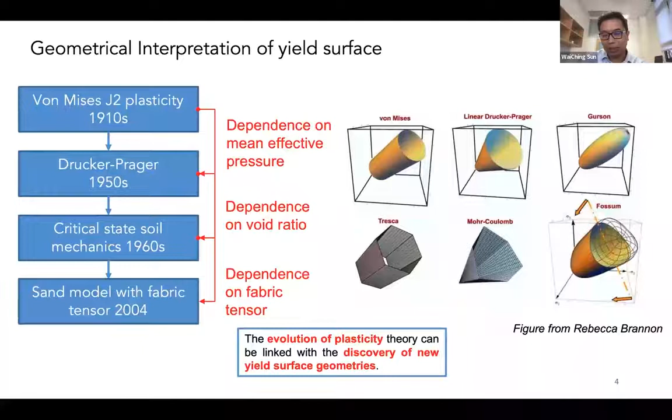But there are scenarios that make this approach, where we try to come up with a mathematical equation to describe the model, very difficult. And they are related to the dimensions. All those materials shown before assume isotropic behavior, and so the stress can be sufficiently represented by the eigenvalues of the stress tensor, which are actually the principal stresses. But if you don't have any symmetry, you are dealing with at least 6-dimensional components of the stress to create these criteria. And if you have the size effect, then we actually need to include a higher order effect.

And then we also need to think about how to evolve the history dependency in terms of the internal variable. I just want to show an example of a recent work we did with the micropolar yield surface. We have a direct numerical simulations model that we are using to homogenize to get a macroscopic yield surface.

And in this material, we have the classical strain mode, kinematic mode that actually create a stress, but we also have a non-conventional stress called a couple stress. The tractions of the couple stress are related to the moment divided by the area, not the force divided by the area. And you can see the complexity when I deal with that 6-dimensional space. This is not even the micromorphic shown here, just the micropolar.

You can see that when we want to do simply a regression in such a high-dimensional space, it becomes increasingly more difficult. Okay, so one may say that a curve fitting in 1D probably doesn't need machine learning, but in such high-dimensional cases, how we create the right geometry is actually necessary, and how this geometry affects the physical response is also another important thing that we would like to explore.

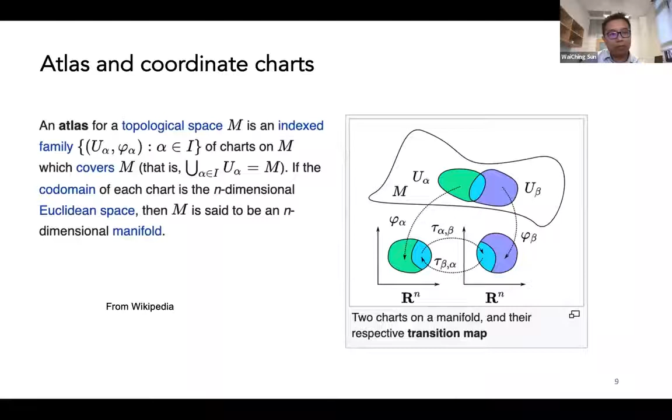Okay, so in particular, what we're trying to create is those local mappings that can allow us to describe the yielding, and then we want to connect them so that they can form an atlas that is actually consistent with each other. And this would be the alternative approach to allow us to define the yield surface.

And what we actually want to show is whether this really complex approach is necessary or not, and if we're actually using this, what is the benefit? In this particular case, what we actually want to answer is if I change the microstructure, how would the corresponding yield surface change, and whether we can predict the evolution of those yield surfaces?

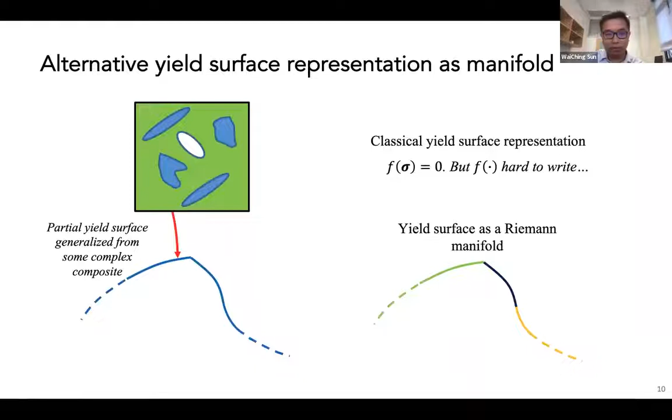Okay, so from a procedure perspective, I will explain what they did here. Imagine that the true answer is just a von Mises yield surface. That would make this approach completely unnecessary, but for the argument's sake, we want to do that. Then if we measure the yielding of a von Mises material, we will get those point clouds that are on the cylindrical object. We can partition those point clouds using Poisson disk sampling. And then we can learn the local coordinate chart mappings one by one to form local patches.

And then the final machine learning procedure is to make sure that in the overlap regions, the two patches are actually consistent with each other. This is the machine learning approach, in which each local patch is trying to learn the mapping of the yield surface locally, but not globally. This could be helpful for a material that requires different fidelity in different regions of the yield surface.

But long story short, we did not do anything special except that we use multi-layer perceptrons that are overparameterized, and we use specific distance measures. In the classical way to create a yield surface, we would use the mean square error. Here we use the Sinkhorn regularized distance that comes from optimal transport theory. There's an entropy term there, and we will see why this entropy term is useful. We try to fit it, but we also want to allow some level of entropy, and this entropy term could help us to overcome the noise.

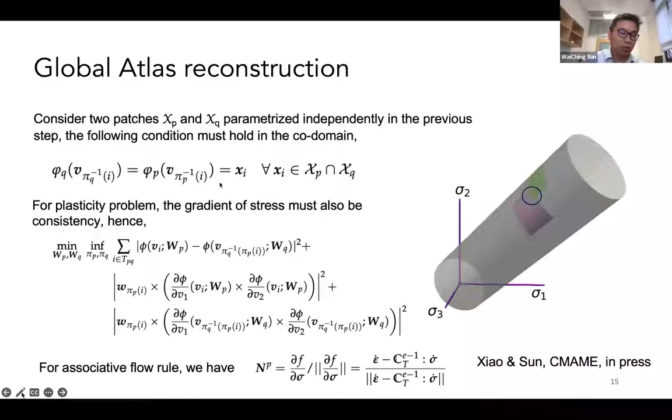Here, the machine learning is also trained in two steps. First, we ensure that the individual patches are trained properly, and then between the two patches, we need another training to make sure that the two patches are consistent with each other.

Okay, so this would give us not just a good representation of the yield surface, but more importantly, we found out that this could have a benefit in dealing with a material that has very sharp changes in the plastic flow directions. So we will introduce a closest point projection to deal with the non-smooth yield surface problem. So this is the yield surface.

And now notice that we no longer have a global yield surface, but we have individual patches. Each patch actually has a center. When we try to introduce a return mapping to get the correct stress, we will run the algorithm with a trial stress and we try to return it.

In the classical way, this is not a problem, but in Mohr-Coulomb plasticity, in the corner, because there are two admissible stress gradients, the stress gradients are bifurcated, and so this would lead the Newton-Raphson algorithm to have a hard time converging.

But in the new approach, because we can conduct the local projection between the local patch and the trial state, but not through the entire global yield surface, we can bypass this problem by having the manifold projection directly onto the individual patch.

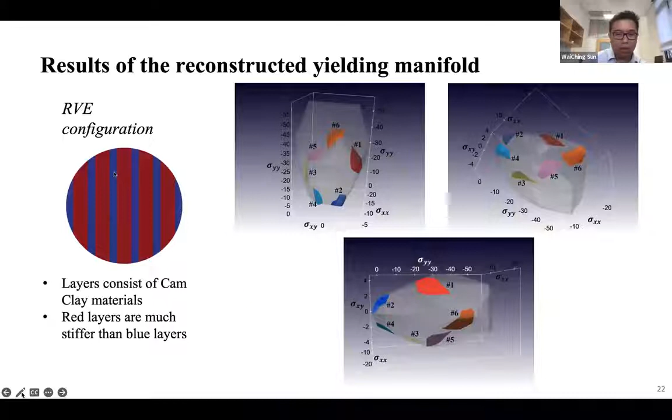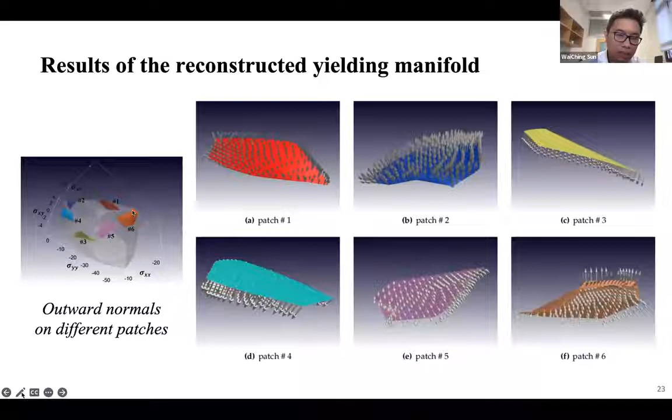You can see that surprisingly, the actual yield surface that is necessary to construct is way more complex than what we think, even though it's just a layered system. And if you look at the stress gradient, you will see the same. Okay, it's not like a circle. And you can also observe some sharp corners in some of the stress space, like in patch number 6, where you can see the abrupt change in the plastic flow directions.

And this could be explained by the pattern of the direct numerical simulations in the subscale. What we actually see, which I think is pretty interesting, is that when the two plastic flows are actually similar, the underlying deformation patterns are actually quite similar. This is actually the stress space loading in slightly different stress combinations on the same yield surface at different locations. And you can also see that when the two yield surfaces are similar, the underlying microstructure deformations are quite similar. However, if we have something that is very far apart, we can see that the pattern could change quite a lot.

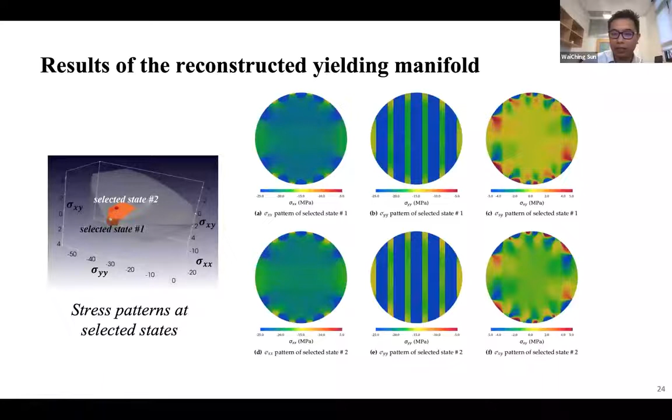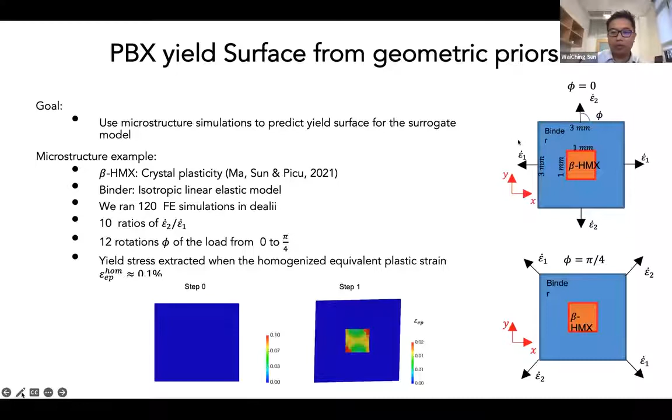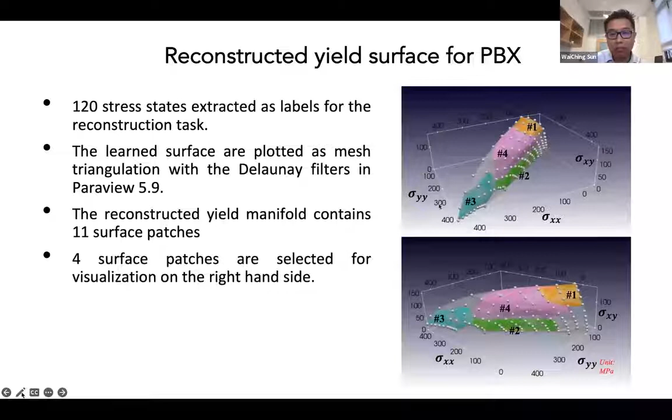We can also apply this. This is just another example on the HMX with a polymer layer that is actually used for explosives. And in this case, in the 2D simulations, when we try to homogenize it in that patch, you can also see a different geometry that is actually pretty hard to parameterize by hand. You can also see that for different states, the shape or the plastic flow directions are actually constrained so that they are consistent with the yield surface.

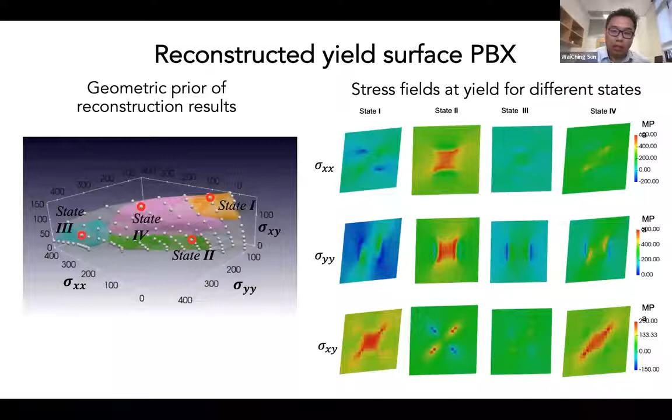So what we actually find out here is that for the actual yield surface, if you want to increase the quality of the predictions, or more accurately the precision of the yield surface, you require more advanced geometrical tools to create arbitrary objects that represent the boundary of the path-dependent and path-independent behavior. And this manifold approach can provide a convenient way to introduce arbitrary complexity. The same thing can, in principle, apply to elastic energy functionals or other types of material as well.

Now, the second question that we would like to tackle is how do we evolve those yield surfaces? If you know the material yields, the material can also evolve beyond yielding. So how do we capture that? In a classical way, as we mentioned before, we're going to hook up some kinetic rule like the void ratio, like a Gurson model. We're saying that the yield surface depends on the void growth, and then we try to come up with a story, and then that story, confirmed by observation, converges into mathematical equations.

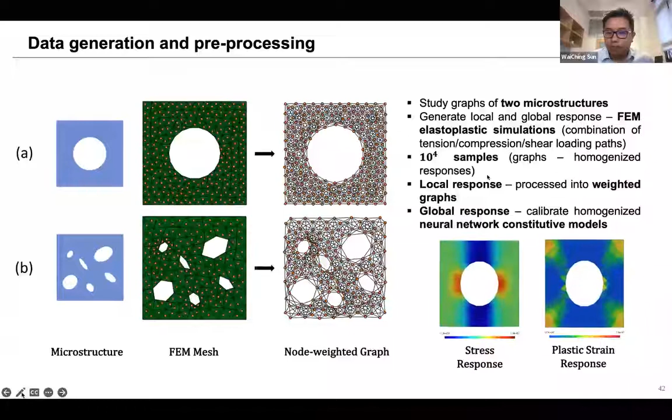These are two examples we tried. There's a classical hole problem, and then there's another problem with void distributions, and then we collect a lot of finite element simulations to create a database that's not exactly that large, but with 10 to the 4 samples. And then what we actually want to do is to see whether we can predict the evolution of the new plastic strain. So to do that, we need to see how much dimension we need for the latent space here.

And what we actually did, in this 2D example, is that we tried multiple spaces, 2-dimensional Euclidean space, 16 and 32, and then we see what the trade-off is. As we can see, if you increase to a larger dimension latent space, I can get more detailed performance, and then my loss will go down. But if I keep adding it, there's a diminishing return on adding more dimensions to represent the data.

You can also find that in a linear method, like singular-value decomposition. The only difference is that in the graph case, the dimensional reduction is not conducted in a linear manner, but in a nonlinear manner. So this is the internal variable graph, and this is the reconstruction. The reconstructions are using a vector.

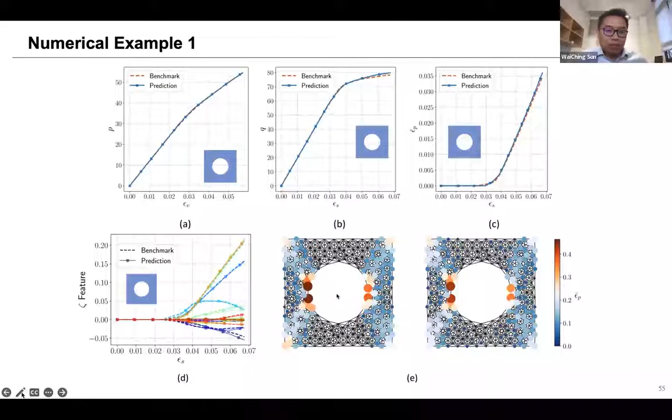This is the time evolution, and then this is the direct numerical simulation response corresponding to the return mapping constitutive law response with access to the microstructure. And you can see that by controlling the feature in the very low dimensional vector space, I can actually get back the details of the deformations. This is also the case for the more complicated architected microstructure.

And then we can also check that the advantage of it is that we can actually also control the detailed physics. In particular, in this example we can also ensure that if the material is unloading, the internal variable is actually not evolving, which is actually hard in a black box RNN setting because there's no distinction between the elastic and plastic, and then there's no internal variable that can be integrated.

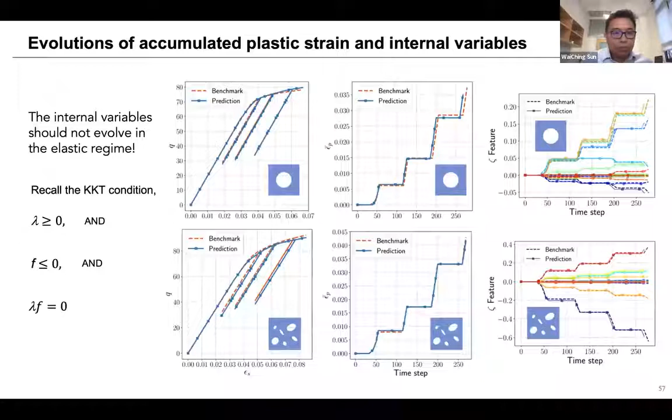So the last question, I think I'm almost running out of time, is that I want to talk a little bit about not just what we do with the data, but how we get the data. So if you notice, we need to write a very high dimensional model. This is, by the way, related to a project on the micromorphic continuum, where we need to write a micromorphic yield surface that is very high dimensional. But here, what we want to think about is the real questions.

In real life, when we try to get the data, we actually need money to do it because we need a physical experiment or MD simulations or dislocation dynamics. But anyway, that time and effort are finite. How do we actually use as little data as possible to create a good model? So the experiment itself here could be represented by a Markov decision process. We can think about the experiment as a situation where we continuously perform different tests, and then it has a reward.

I won't go over the details because I think I'm running out of time, but what I actually want to talk about is that in our new work, where we try to use a type of machine learning, deep reinforcement learning, to design what kind of loading path I need to create a specific model, we can actually also take advantage of our representations of the state.

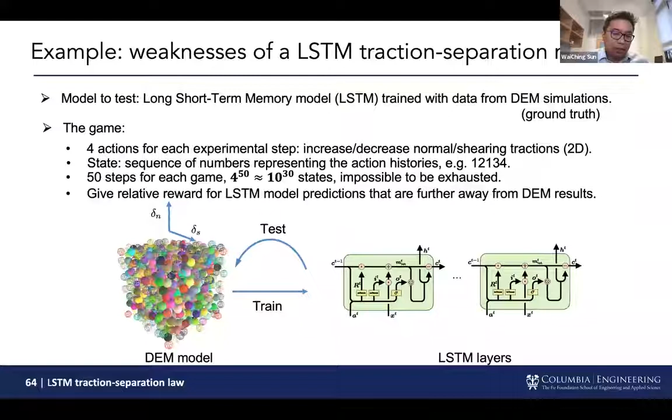And then we basically have a lot of traction and separation, the deformation to create a database, and train the long short-term memory layer to replicate the stress-strain behavior. You can see that on the surface, the LSTM can provide some very good response. But we can also use reinforcement learning to find out the weakness. This is the actual weakness of the LSTM simulation.

I hope I'm not going too fast, but our conclusion is the following. In the big picture sense, we want to see whether we can come up with a new type of model that is not only able to explain the physics, but quantitatively represent the solid mechanics behavior in a predictive manner, in a very precise sense. So precision is what we're trying to achieve in this line of research.

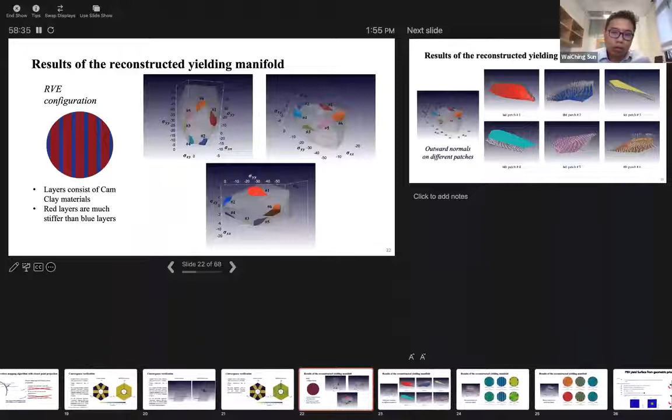If you have fewer patches, in principle, you can actually put the burden onto the local mapping, but then you need to learn a more complex mapping. And also, I want to mention that there's another thing we need to think about: there's no guarantee that all the patches would create a closure, which could also be a problem. In this case, we have a closure, so we know that the object is actually closed.

But in the von Mises case, there shouldn't be any closure, because that cylindrical object goes infinitely in the infinite directions. So this is actually something that could be a limitation of this approach. It's actually better for the material property, for the parametric space, to have a closure. If you anticipate a half space, then it won't be as efficient. So, like the von Mises, it doesn't depend on the mean pressure, right? So this can go to infinity, but then your patch is finite. So anyway, this is one of those things. But in general, you can always find a parametric space that actually creates a closure.

Okay, thanks for all those questions. Any other questions for the speaker? Professor Sun? If no one else is there, I can ask one more. Yes, Suku, please. Sure. I can talk to you afterwards, of course.

The other question was, did you also check, depending on the architecture, the depth and width of the network? Do you get convergence if you change the number of neurons, basically? Oh, you mean do I tune the hyperparameters? Yeah, if you change the hyperparameters, do you have to play around with that, or do you get pretty much the same result? If you tune the hyperparameters, you will get different results. But I would argue that, for the multi-patch approach, you probably have an easier time tuning them.

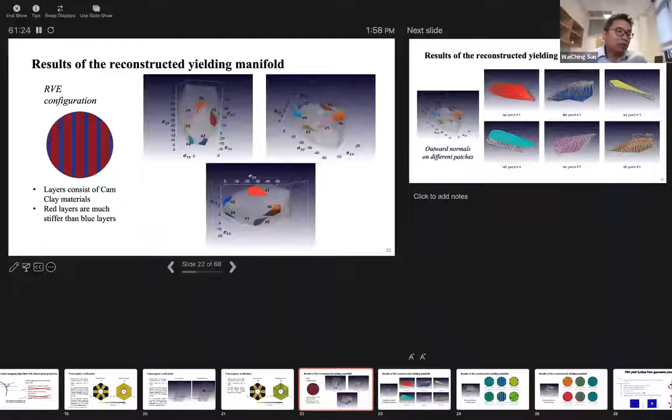simply because I can address the complexity by reducing the size of the patch to make sure that individually the complexities are roughly similar. You can also change it multiple times, but this is one of the important questions. Instead of choosing one difficult problem, I want to break it down into something as simple as possible. But hyperparameters always affect the neural network performance. Okay, thanks a lot. Yeah, I agree.